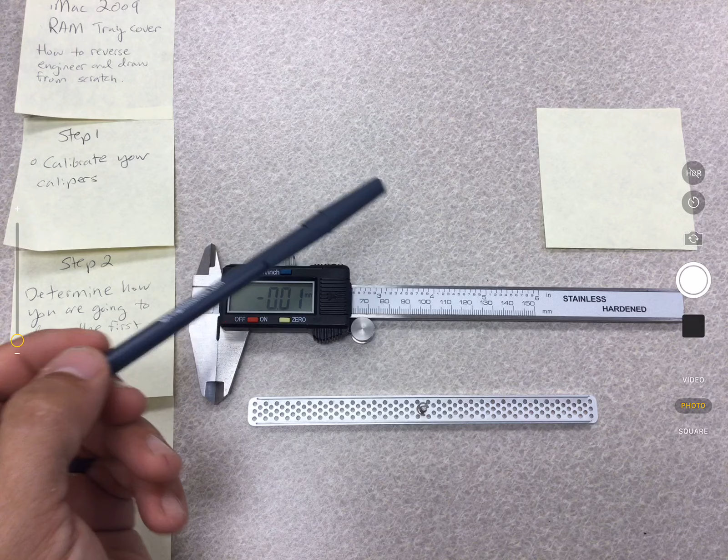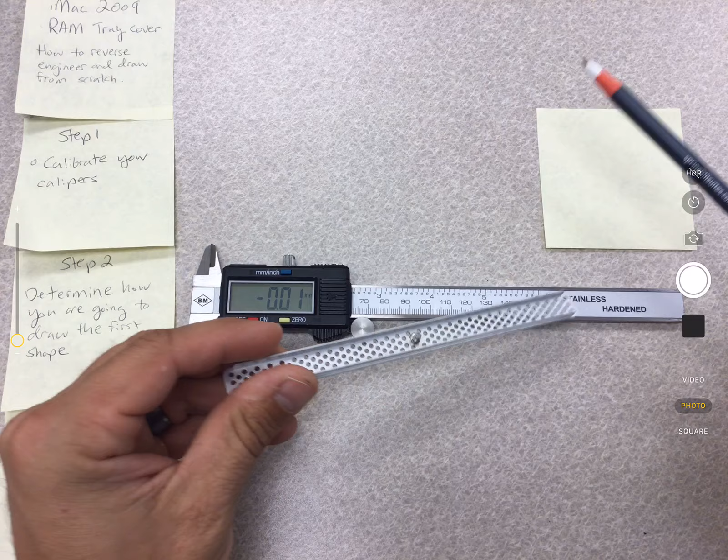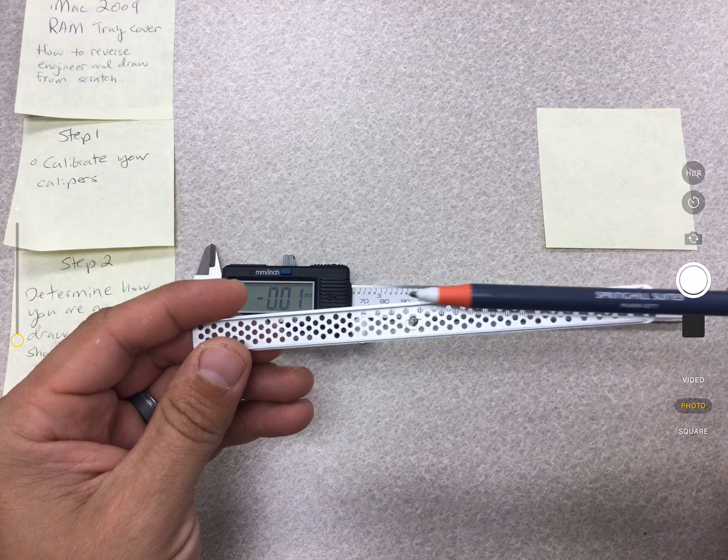All right, your next project is going to require you to use digital calipers, and it's going to require you to reverse engineer something from scratch that's physically in front of you. So I chose the 2009 iMac RAM tray cover that goes underneath the display as a good project for you to work on.

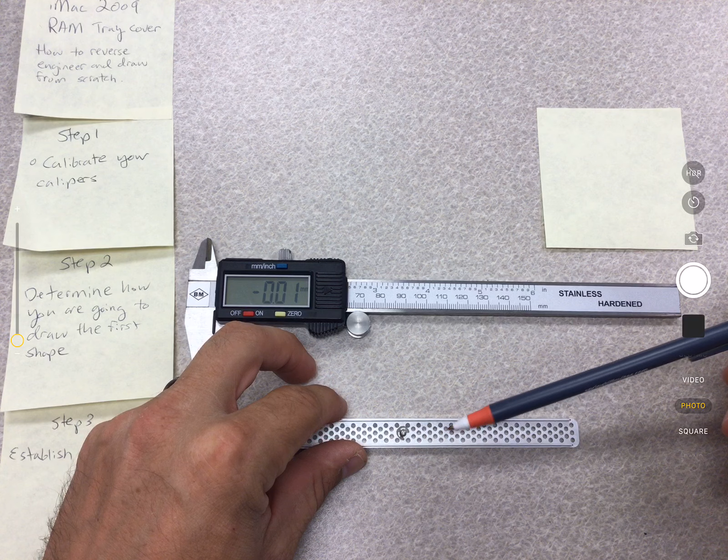Now this is going to be tough, but I want to make sure you understand the basics of a digital caliper and how to use it to measure all the different measurements you need to redraw this product. I also want to walk through the steps with you so you can see how to think about redrawing a product. Now there's no one way to do something, so there are multiple ways. This is not the one way you should always do it.

So the first step is, let me teach you about your digital calipers. They have 3 ways to measure. They can measure the thickness of a product by the outside of the jaws, from this tip to this tip, or the diameter of a circle or the width inside of an object, because it measures from this point to this point, and also the height is measured here.

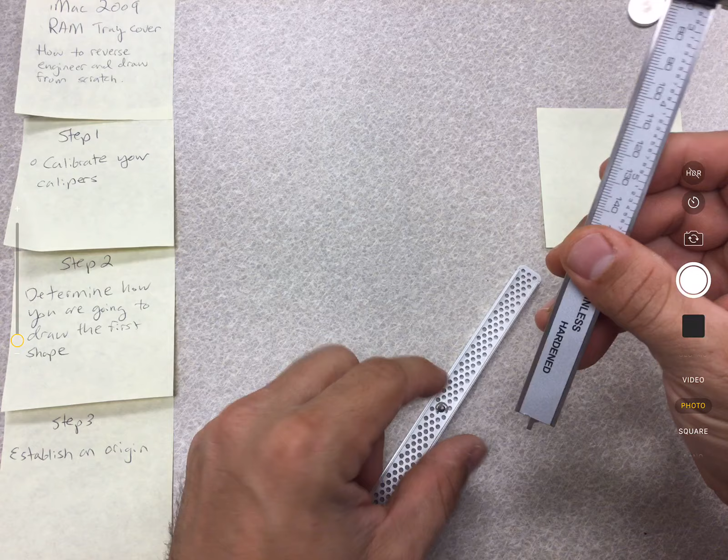So if I take the calipers and push down, it measures the height from here to here on the product and gives you the measurement. It would be the same. That was 5.5. So if I do the same thing, I basically get almost the same measurement of 5.5.

All right, so let's get started. The other thing you need to know is the buttons. There are 3 buttons you need to understand. The 0 button will actually zero out the caliper and establish that it's 0.

Sometimes people make a mistake, push the 0 button, and come back and the number is negative. So if the number is negative and the jaws are closed, you must close the jaws and push 0 to make it 0. Then up at the top, if you're not in millimeters, you come up to the blue button and push it. This toggles between inches and millimeters. We want to stay in millimeters.

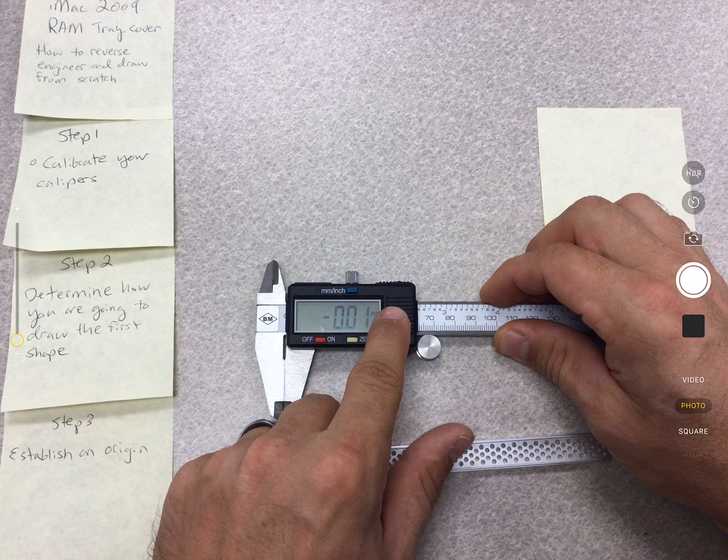All right, now if you're negative 0.01 millimeters, that's nothing, please don't worry about it. And again, off and on, that's how you turn the calipers off and on.

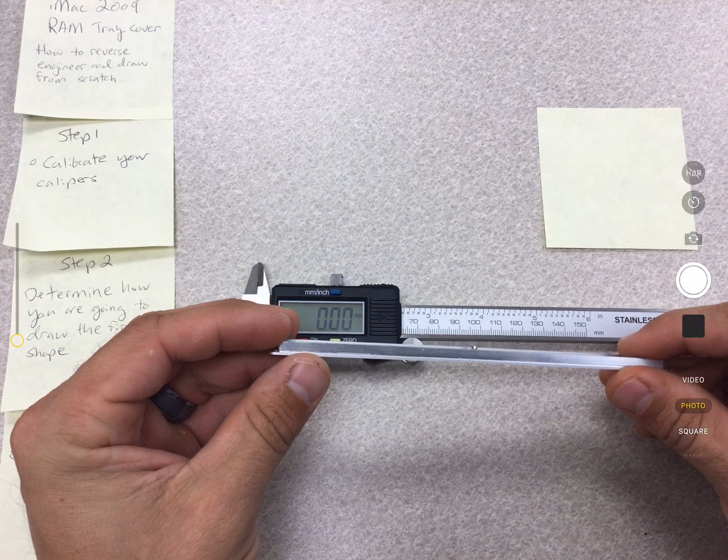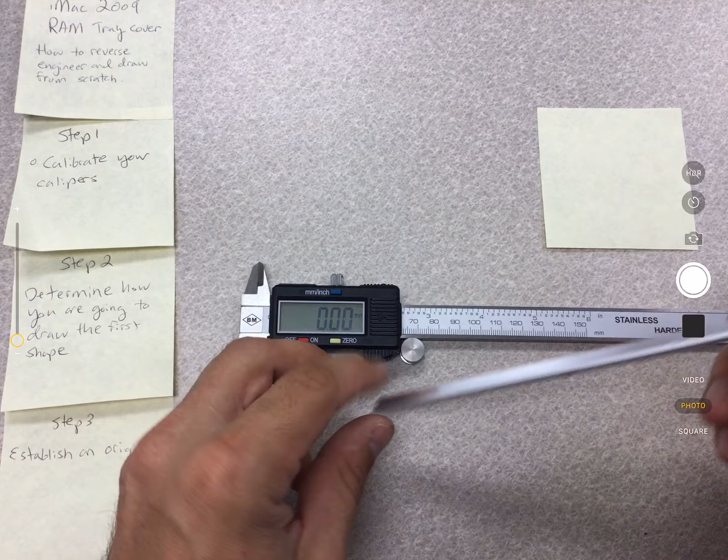All right, there are 2 ways, actually 3 ways, I think I could draw this. I could draw it like so with a thin rectangle and come up here and do the same thing. Or I could draw it flat as a rectangle and then extrude up, which might not be a bad idea. Or I could draw the shape right here and have it extrude all the way down. So there are 3 ways you can start with drawing it.

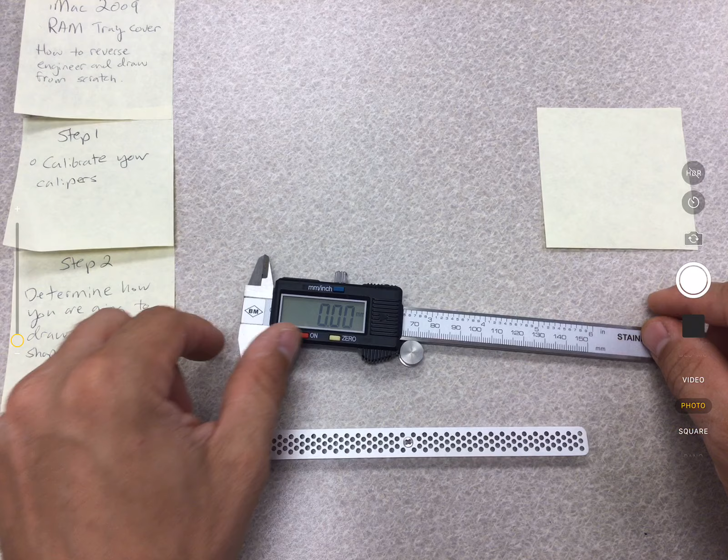I'm going to choose the rectangle method first because I think it's most visually easy to see what I'm doing. So the first step is I need to measure the length, the width, and the height to draw the rectangle. Then I'll come back and get these rails at the end. So let's go ahead and measure that.

So the width is pretty easy. Go ahead, let me write this down. We've got to draw the width, we've got to draw the length, and we've got to get the height. So here we go, let's get those measurements.

So the width is pretty simple. Open the jaws, come over to the part, and squeeze. So 12.75 sounds like a good number to me. So I come over to the width and write down 12.75 millimeters. All right, now I need to establish the length.

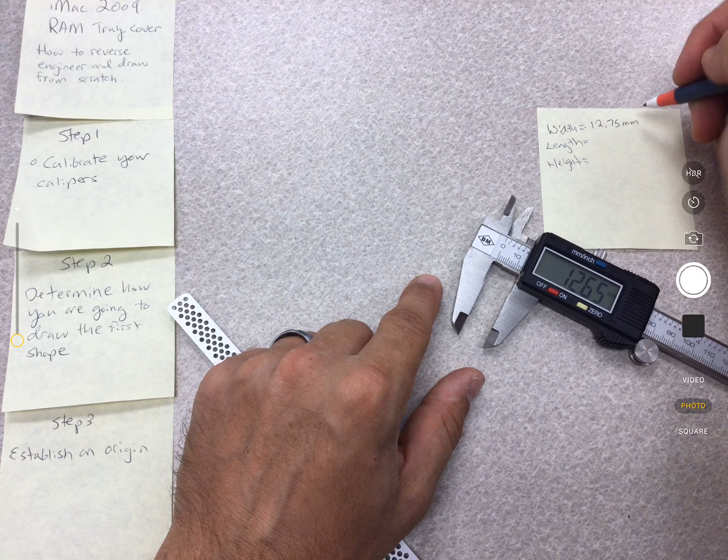All right, so here we go. The length might be tricky because the jaws aren't the same, it's not going to reach all the way. So if I put this down, and let me get this all the way out, it looks like there's 157, and it stops right there where my finger is. So what I'm going to do now is measure where my finger is.

Here we go. And it looks like 6 millimeters, all right, so 5 millimeters. So 157 plus 5 would be 162. So if I come over to length, I'll put 162 millimeters.

Now I want to double check this, so what I'm going to do is take a tape measure just to verify the measurement. I'm going to come all the way out to here, and it looks like it's 6 6/16 of an inch. So if I convert that online, 6 6/16 of an inch, I actually find out that I'm correct. It is 162 millimeters long.

So sometimes you might have to use a good old-fashioned tape measure if your digital calipers aren't long enough. All right, next thing I'm going to do is come over and measure the height, which is simple. I come right here, squeeze, it's 1 millimeter. So I'm going to write 1 millimeter. All right, so I have the basic measurements I need for the base.

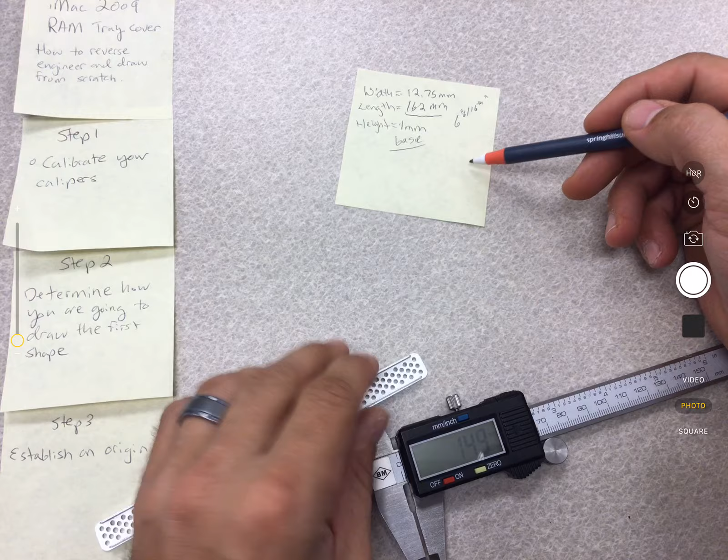All right, so I'm going to go ahead and write that down, and put that sticky note here. Because I'm doing 2 different videos, one getting my measurements and one going back and drawing, I'm going to get those taken care of now. So the next step is the rails. I want to figure out how big the rails are so I can draw them, so we're going to come up here and type the rail measurement.

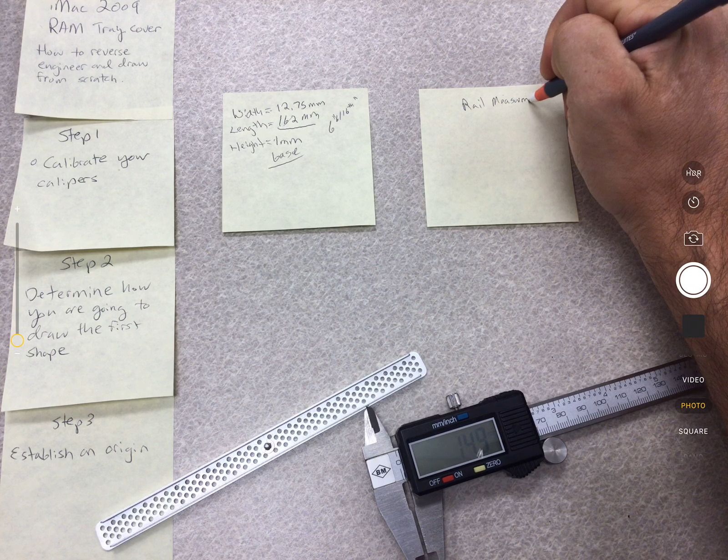All right, so what I need to know is the width, the length, the height, and also its position. I have to know where it's located.

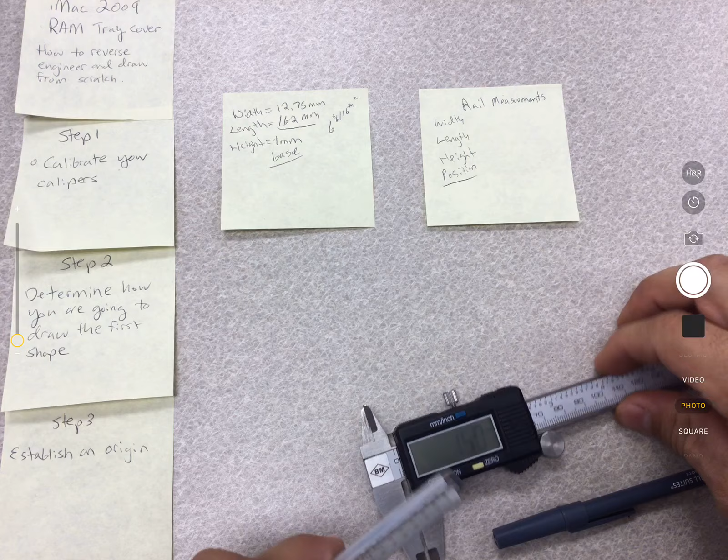First thing I'm going to do is get the width. This is the width, and this is the length, and this would be the thickness. Thickness is easy, it's 0.60. So we'll change height to being thickness, and it's 0.60 millimeters.

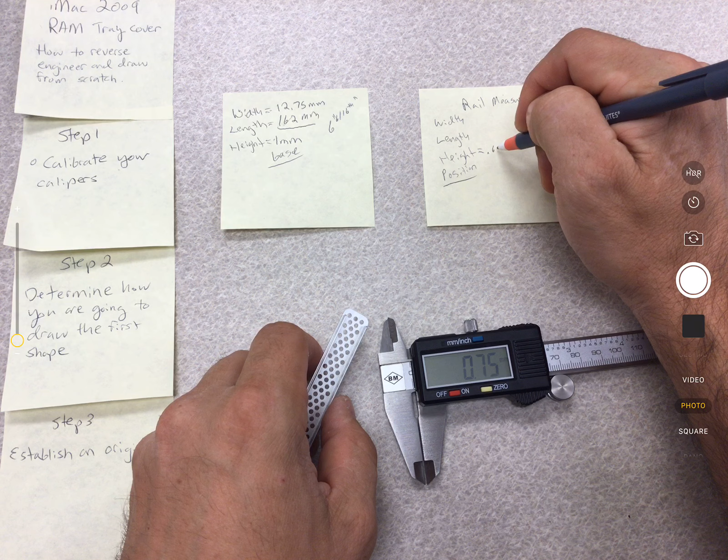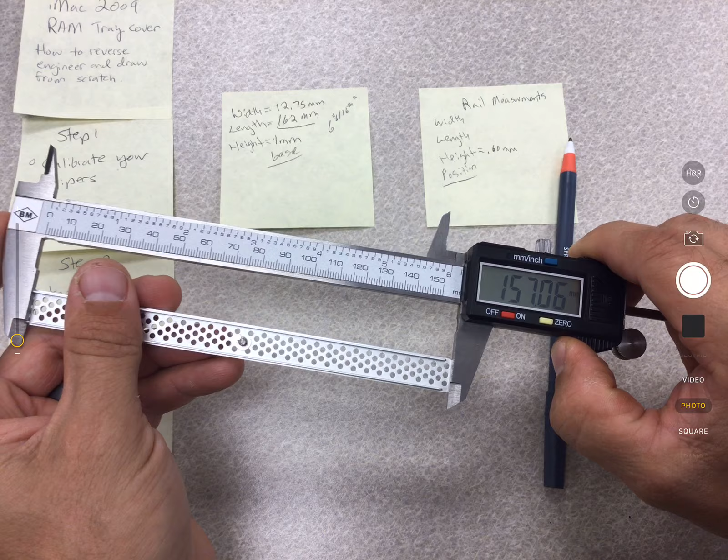Length. Let's see if the caliper can take it all the way across. It should, I'm hoping. If I come all the way out, I think it's going to do it. Sweet. So the width or the length is 154.35.

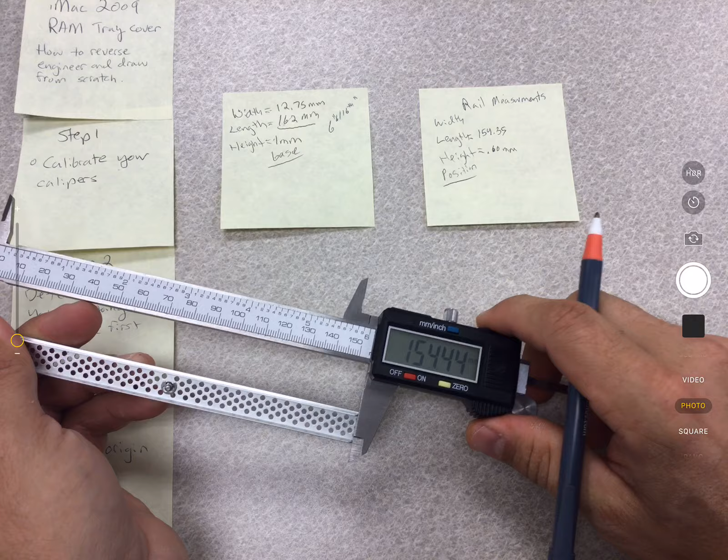And the width, this is going to be tricky. This is where I'm going to use the height tool. And the width is 4.2.

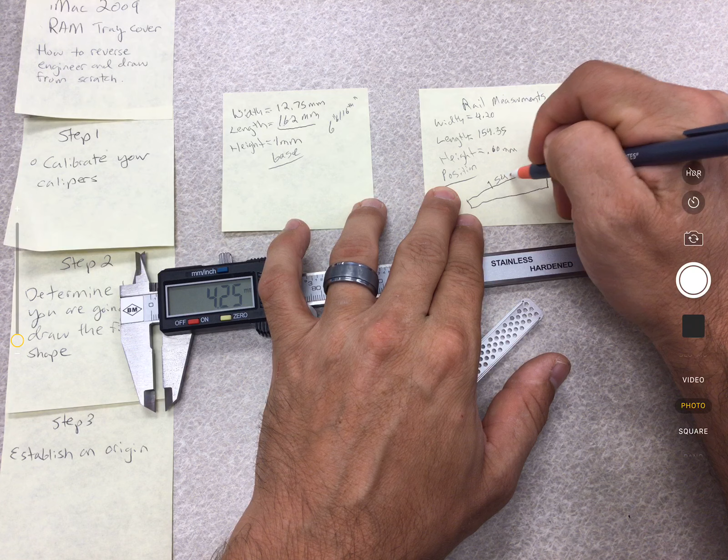So I got it. I know that the rail, if I were to draw it out, is like this. I know this is 154.35. I know that right here, the thickness, if I draw this down, is 0.60 millimeters. And then I know the height from here to here is 4.2. All right, so I got the rail measurements, but I got to figure out the position.

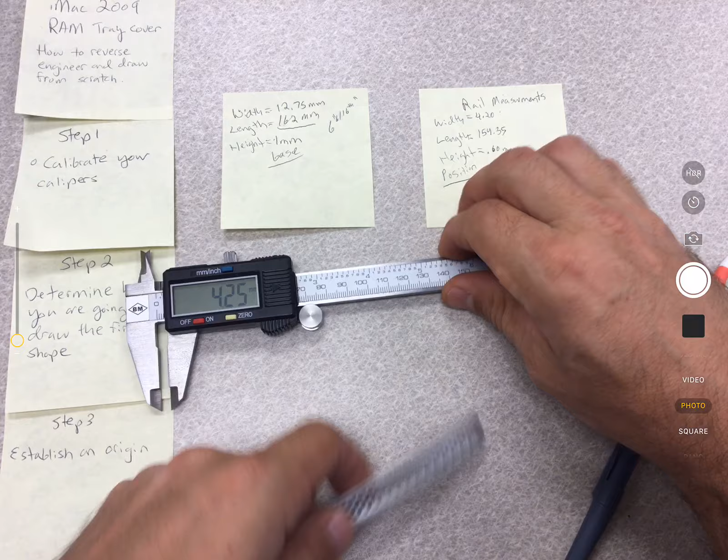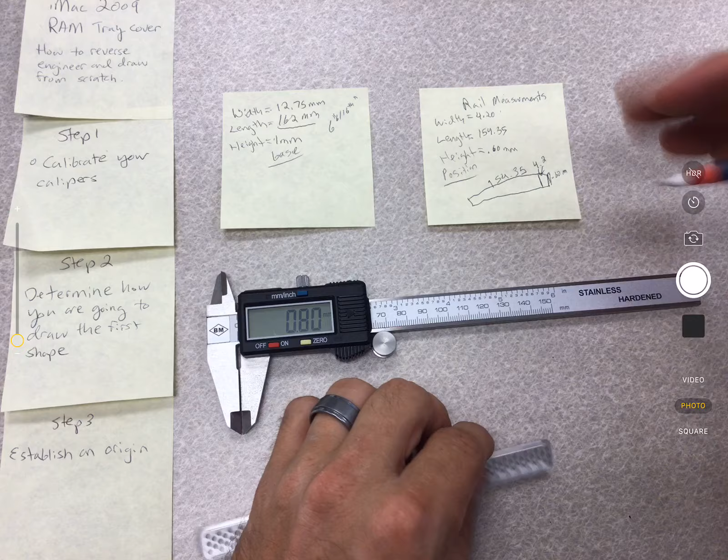First off, the best way to figure out the position is to come here like so, and I know that it's 0.8 millimeters in. So if I draw a rectangle like this, I know the distance from here to here is 0.8. So I've got that. Let's figure out what the distance is right here, and we can probably be good to go.

Same thing, because we'll just mirror it when we get into it. I'm going to try to do the same thing here, and it is 3.4 millimeters. So now I know 3.4 millimeters. So I have an origin right here.

I know that it starts at over 3.4 -- I'm sorry, over 0.80, and then over 3.4 -- and then I can just draw the length and everything, and it'll be fine. I found my origin. So we need to know this.

We're going to go over on the x, 0.8, when we draw this, and the y equals 3.4.

All right, last thing I need to do is the circles and figure out what I'm doing. I'm not going to do them all for you, but I want to get you started. So the circles, let's figure out what they are.

So I'm going to use this tool, and what I'm going to do is basically get the teeth of them in the circle until they catch. It's about 2. I can see real carefully here. All right, so 2 millimeters is what the circles are. To verify that, I'm going to kind of eyeball it, and I know the diameter of the circle is basically 2 millimeters. So we're going to say the circles are 2 millimeters.